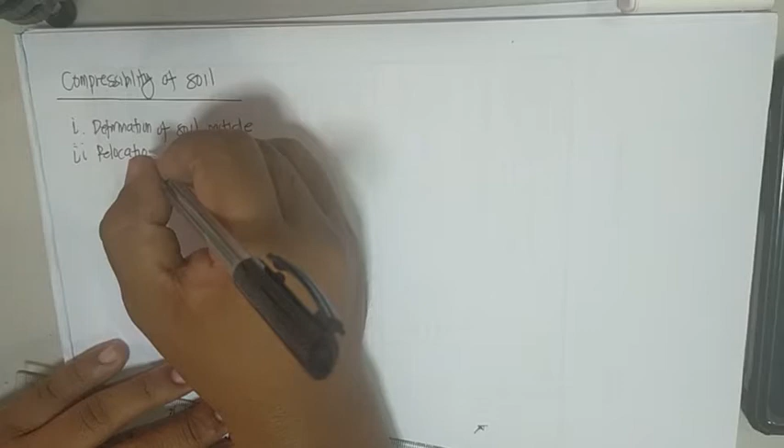the first one will be, there will be deformation of soil particle, and there will be relocation of soil particles.

And the last one will be, there will be expulsion of water or air from the void spaces.

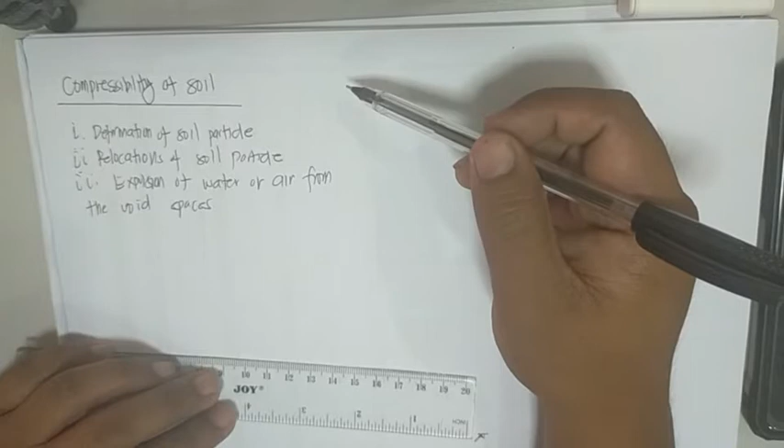Can you see it? So these three are the major factors, or the reason why there is compression. But of course, compression alone comes from the loads of the building.

And because of these three, there will be a settlement. So here, remember, in a soil particle, considering a soil particle, it will have voids and solid soil particles, and these voids can be water or air.

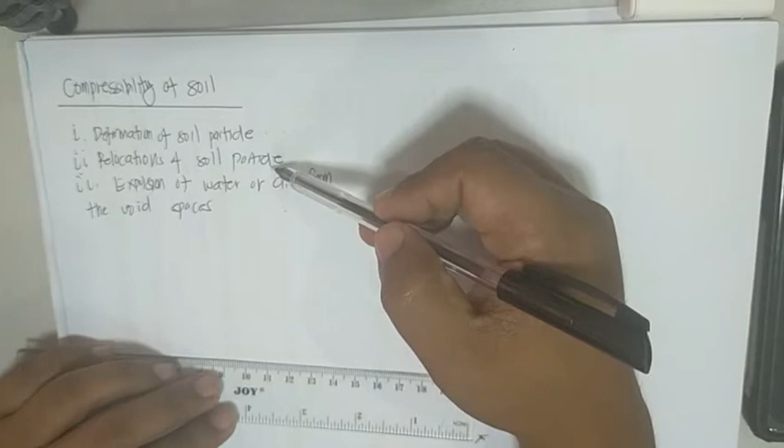So the first thing, when compression happens, it happens because there is deformation of soil particle. Secondly, there will be relocation of soil particle, meaning when we talk about soil particle deformation, the soil itself deforms, based on the load.

And for the relocation of soil particles, remember, considering a container having voids, considering different material, let's say these are the solid particle, solid soil, and these are the void spaces.

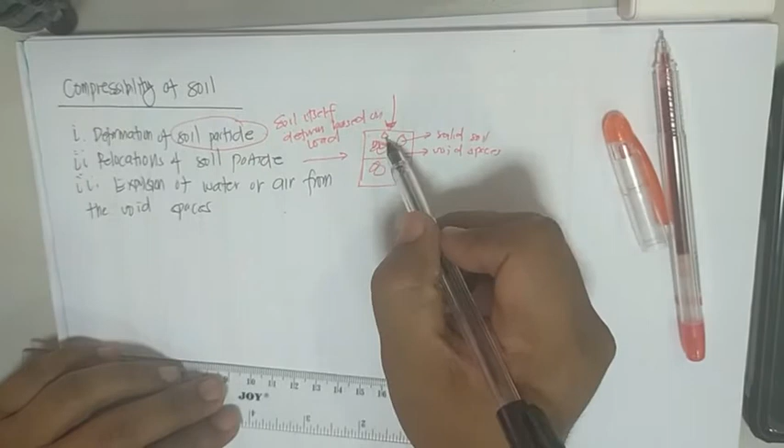So when there is a load, of course, some of the solid particle may move from one point to another point, and because of that, there will be a deformation. And the last one is the expulsion of water or air.

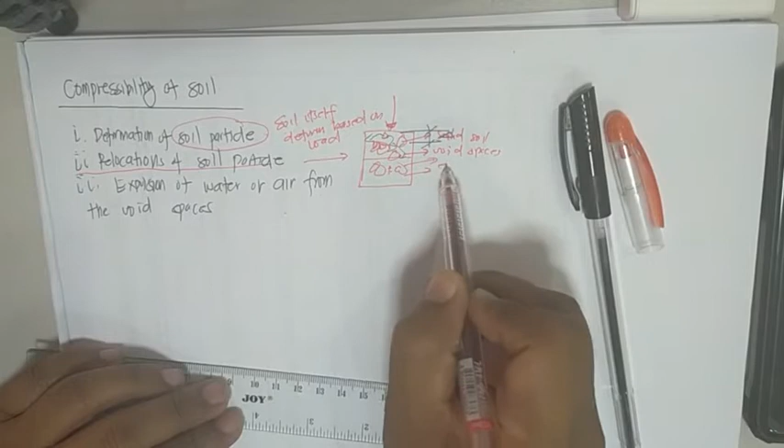So this is a continuous process of the second one. Because there is a relocation, there is also relocation of water or air, wherein some air, if this is the voids, this may be air or water, so there will be some expulsion.

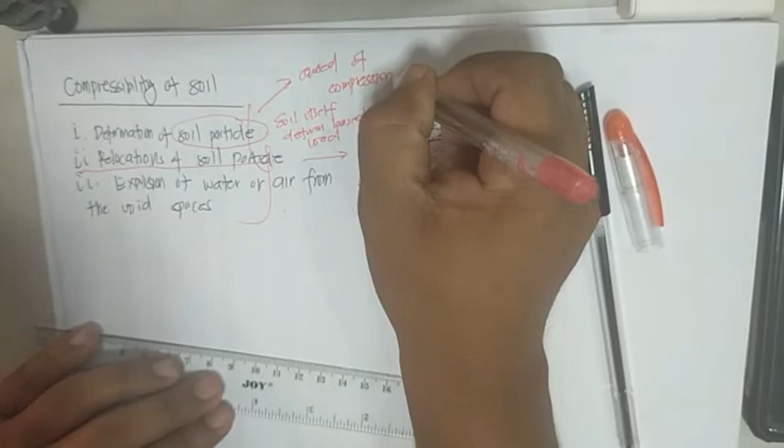So these are the cause of compression. These three are the cause of compression. Compression takes place because of these three. So let's continue, let's go to the soil settlement.

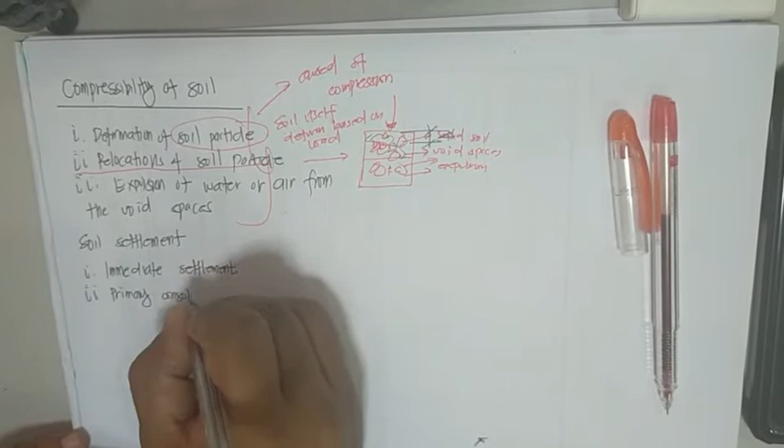So soil settlement will be divided into three. The first one will be the immediate. The second one will be the primary consolidation. And the last one will be the secondary.

So the first one is, this settlement is caused by the elastic deformation. Elastic deformation, whether it is dry, whether it is moist, or saturated.

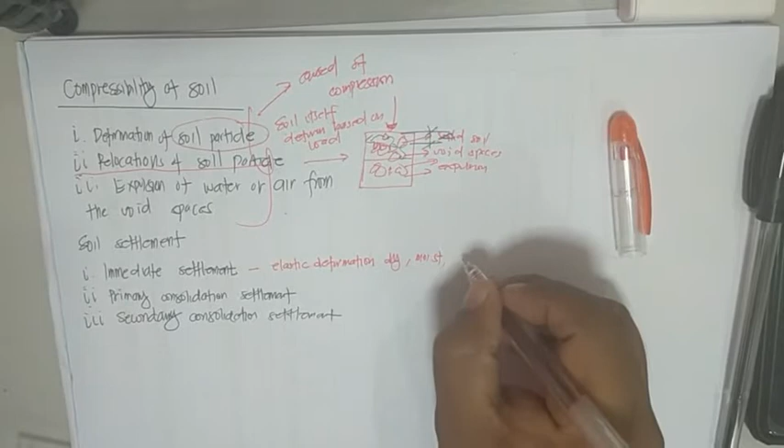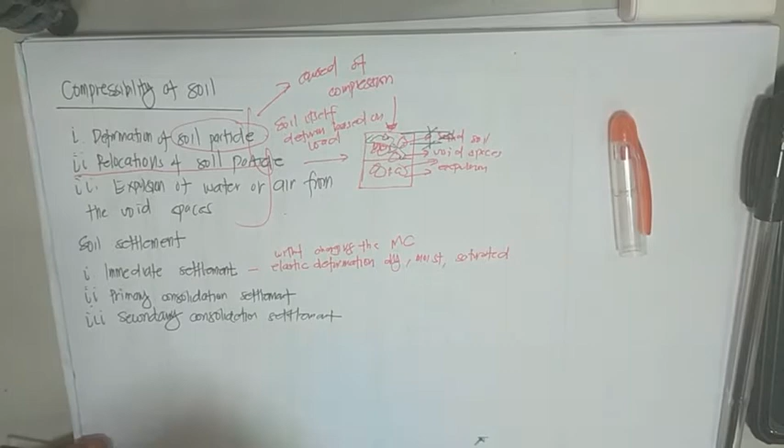Without changing the moisture content. So this immediate settlement is caused by the elastic deformation, whether it is dry, moist, and saturated. When we talk about elastic deformation, we can say that when the load is removed, of course, it will return to its original size and shape.

So immediate settlement is the deformation of any types of soil without changing the moisture content, because once there is already changing moisture content, there will be already the volume change.

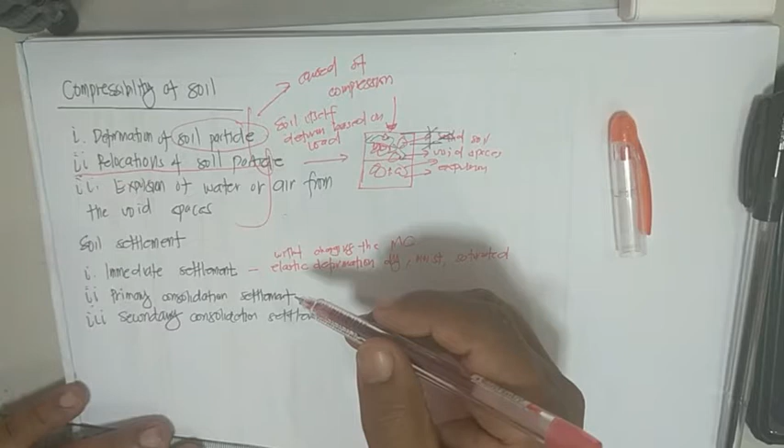So another one is the primary, caused by volume change in saturated cohesive soil due to expulsion of water that occupies the void spaces. What happened here in the primary is, for example, you have a container and you have solid soil and you have void spaces. There will be expulsion of water that occupies.

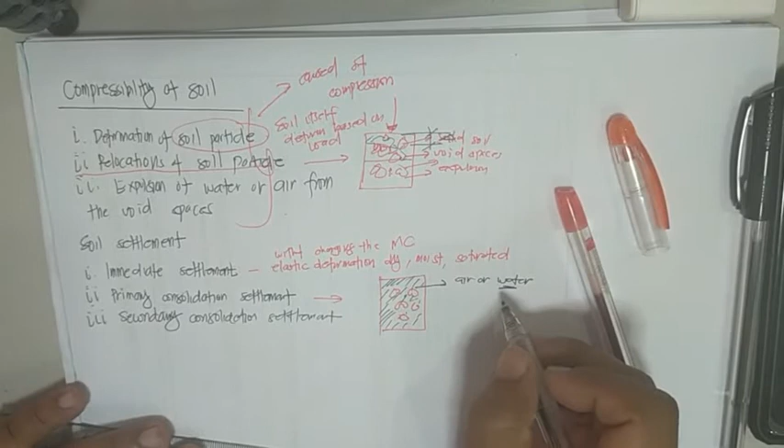So remember that these voids, the black mark, these voids, it can be air or water, but most probably more on water. So what will happen is, because of the load that applies here, some water inside of it will be

removed, or there will be expulsion. This happens because of the cohesive soil. Remember when we talk about cohesive soil, it has the ability to group into one.

Meaning all the soil solid will be together and some water will be out of the container, out of the picture. And of course in that scenario there will be volume changes.

And the last one, the secondary, is caused by plastic adjustment of soil fabrics.

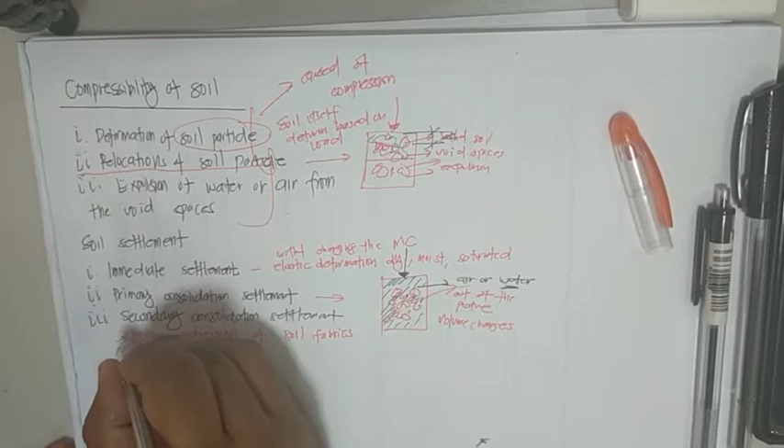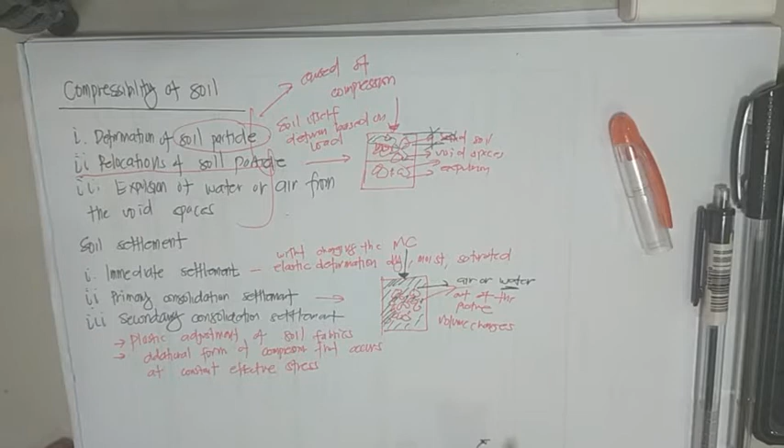So this is an additional form of compression that occurs at constant effective stress. Secondary consolidation settlement happens when there is already plastic adjustment of soil fabrics. If we look at the categories of soil settlement, this is the last one. Secondary consolidation is a form wherein there is already plastic adjustment, and this refers to when the soil cannot retain its original shape.

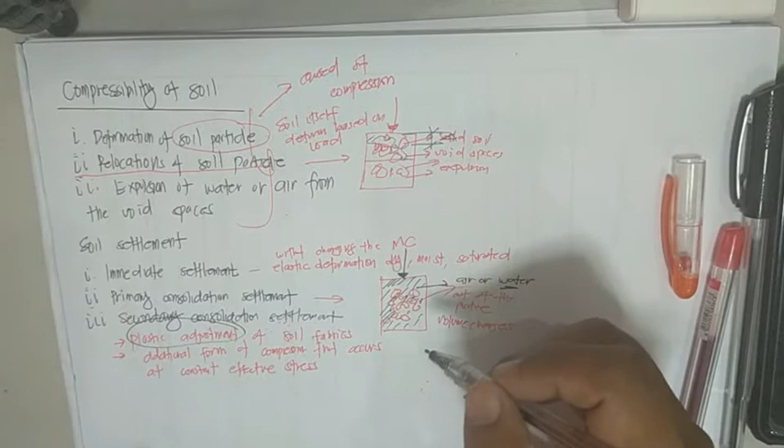So there will be an adjustment, an interaction of the soil when there is already expulsion of the water. Do you have any questions? I hope you understand the theoretical concept, so we can now proceed to the basic settlement formula.

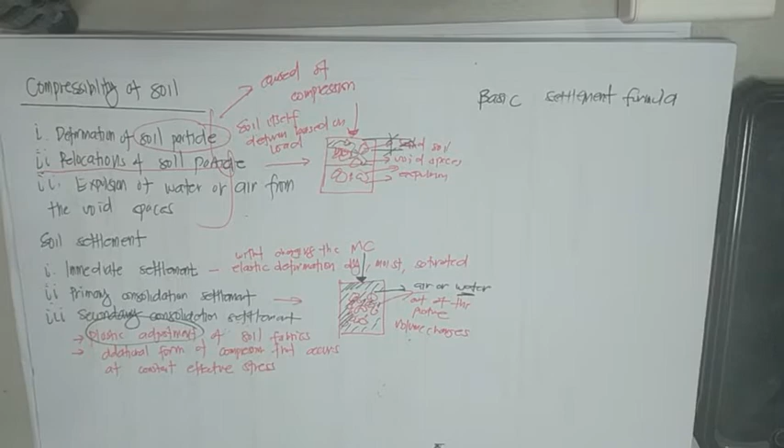What is this all about? The basic settlement formula is the foundation on how we derive the formula for primary consolidation. We can draw a sample to represent this, in the original state, and we have also here the compressed state.

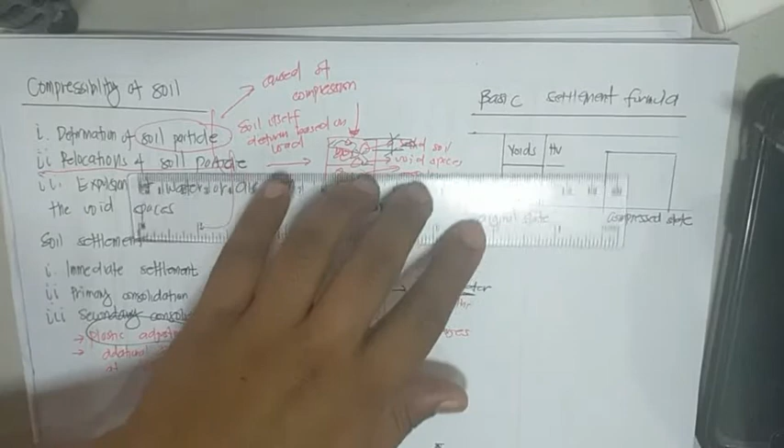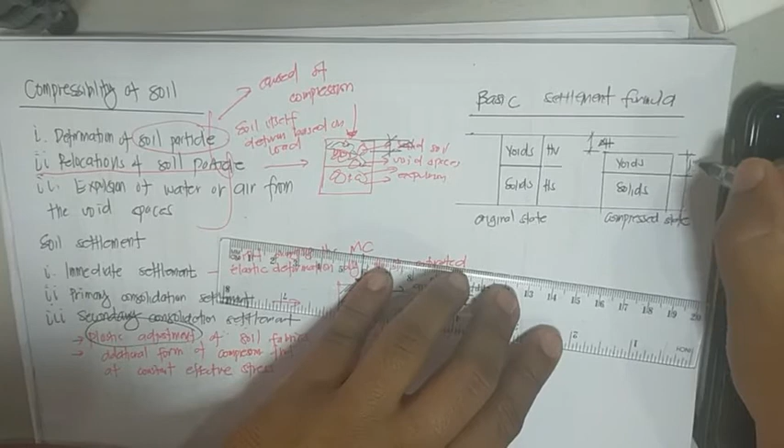Of course, you have here voids and solids. This one refers to height of solid, and this is height of voids. In the compressed state, there will be a difference between the two, which we call delta H. Again, this is voids and this is solids, and this is the height of voids prime, because it's already the new height related to solid.

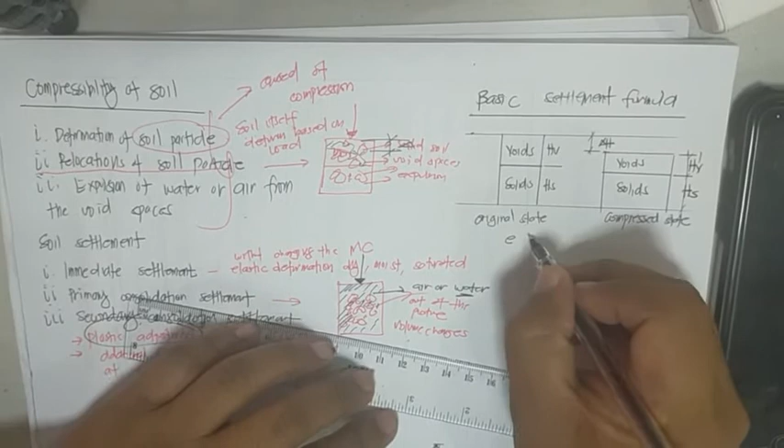What we can notice is, remember that void ratio E is the formula: height of voids over height of solid. So we can say height of voids is equal to E times height of solid. Now, the total height is height of voids plus height of solid.

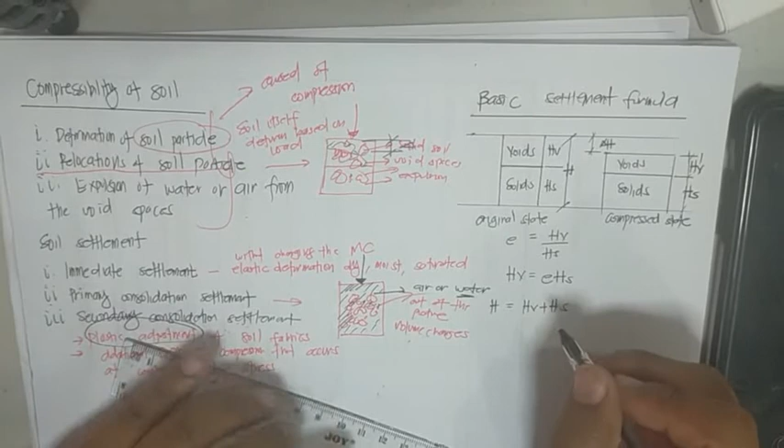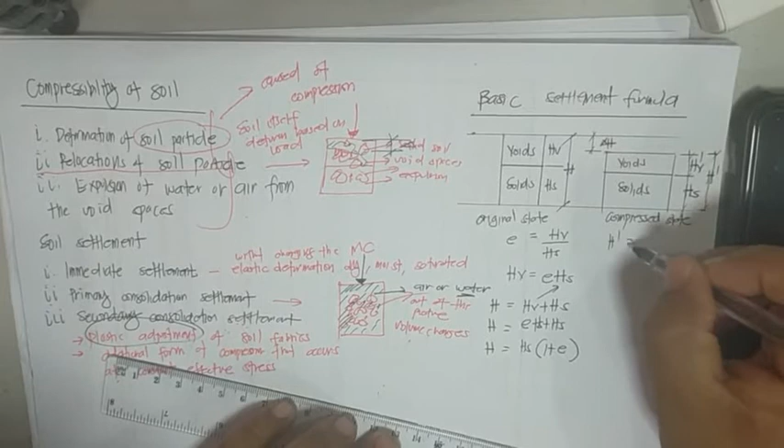Height of voids is E times height of solid, plus height of solid, which is H. So H is equal to height of solid times 1 plus E. If you consider this new value, this is now called H prime, so H prime is H prime of voids plus HS, and height of voids prime is equal to E prime times height of solid.

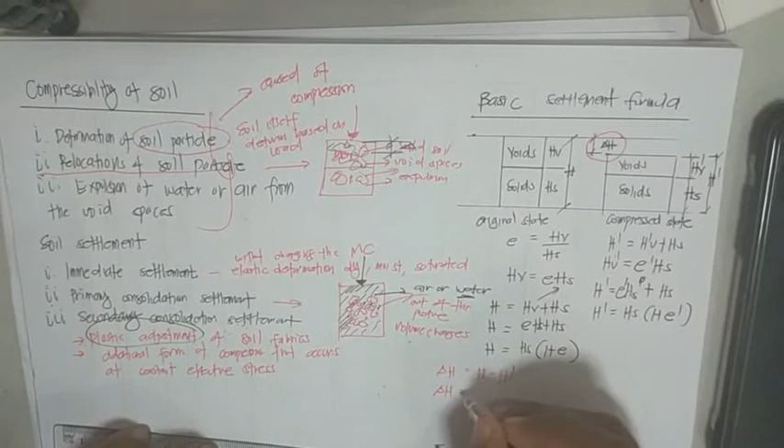So now you have two equations derived. From this figure, what can we notice about delta H? This delta H is actually total H minus H prime. And delta H is H minus HS times 1 plus E prime.

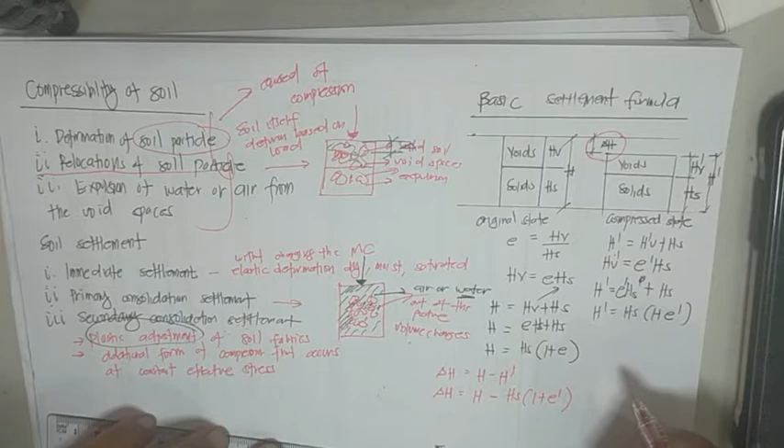But if we notice, and we can equate the value of HS, here H prime is HS times 1 plus E prime. What is this value? Based on that, it will be H over 1 plus E, multiplied by 1 plus E prime.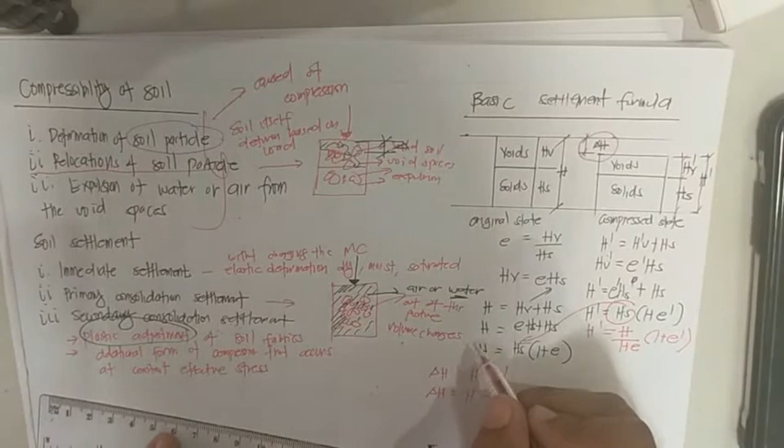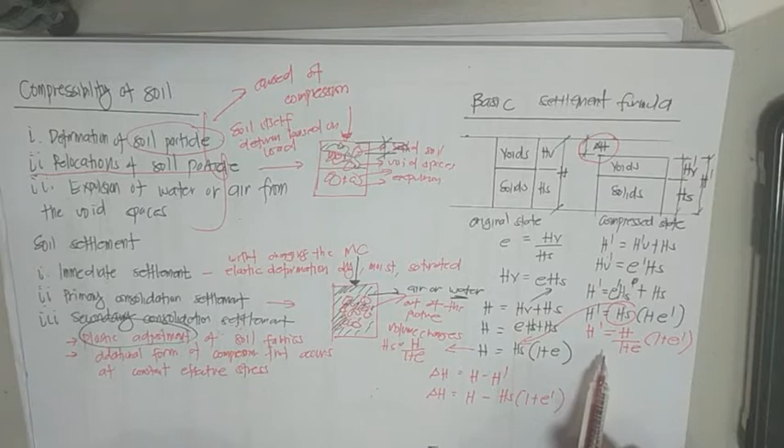Because here, this one is actually HS equal to H over 1 plus E. This is the term that I substituted here. So H prime is equal to H over 1 plus E times 1 plus E prime.

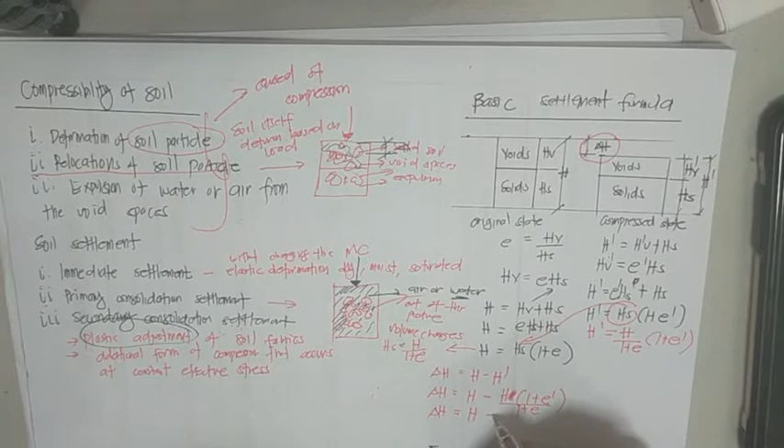What else? So delta H is equal to H minus H over 1 plus E times 1 plus E prime. Or you can factor: H times 1 plus E minus H times 1 plus E prime, over 1 plus E. Which means delta H is actually H plus HE minus H minus HE prime, over 1 plus E.

Cancel this one. Delta H is H E minus H E prime, over 1 plus E, which we can now conclude that delta H is H times E minus E prime, over 1 plus E. Sometimes this E minus E prime is called delta E. Can you see it? So now the final formula is delta H equals H times delta E over 1 plus E.

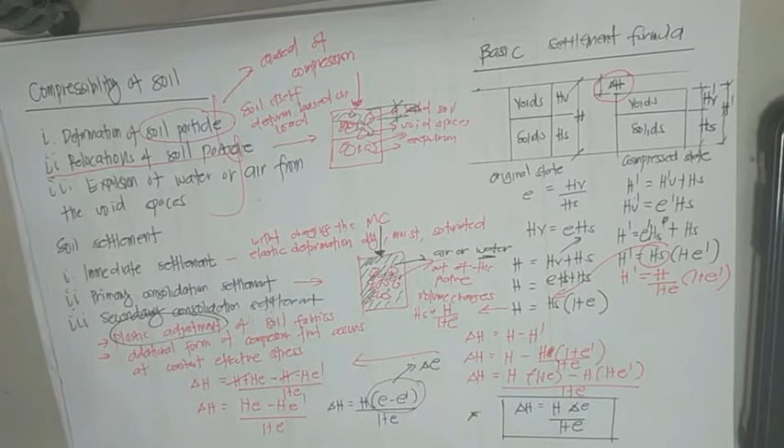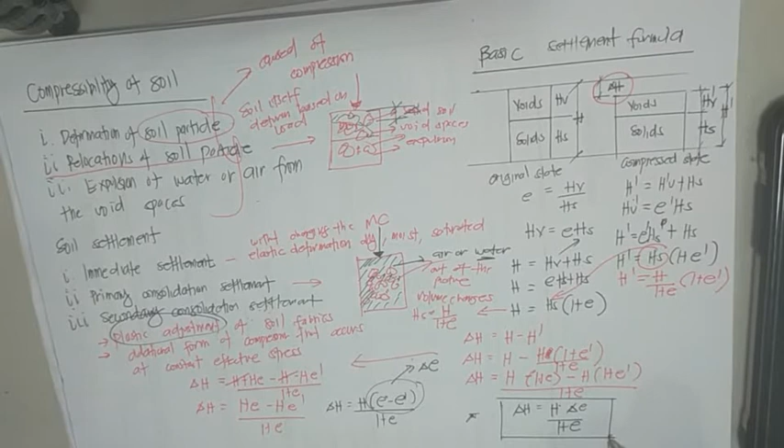Where H is the height of the stratum, E is the void ratio before the vertical load or the original, and E prime is the final void ratio after the vertical load is applied. This is the general term on how to determine delta H, or the settlement. Now we will move to the next subtopic.

Okay, so now we will go to the different empirical formulas that can be used for consolidation settlement. The first one here, we have the primary consolidation settlement, and the first case is for normal consolidated soil.

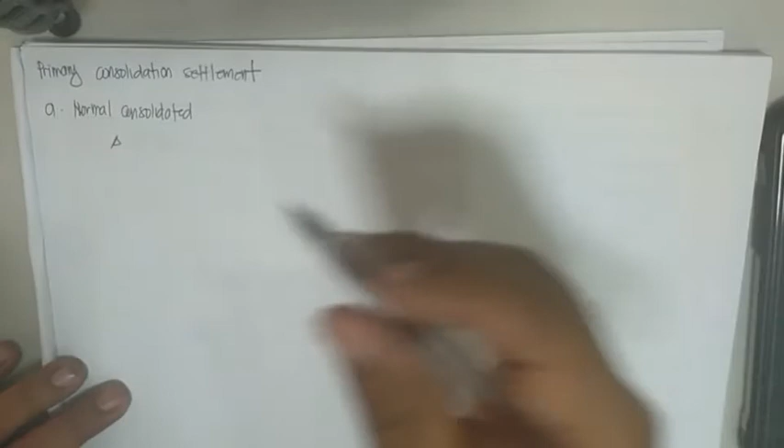So the formula to be used there, for the settlement, is delta H. The delta H is equal to H times CC over 1 plus EO, times log of PF over PO.

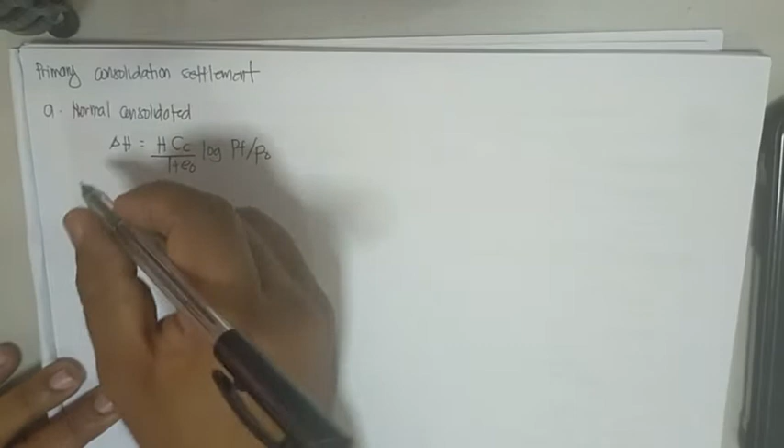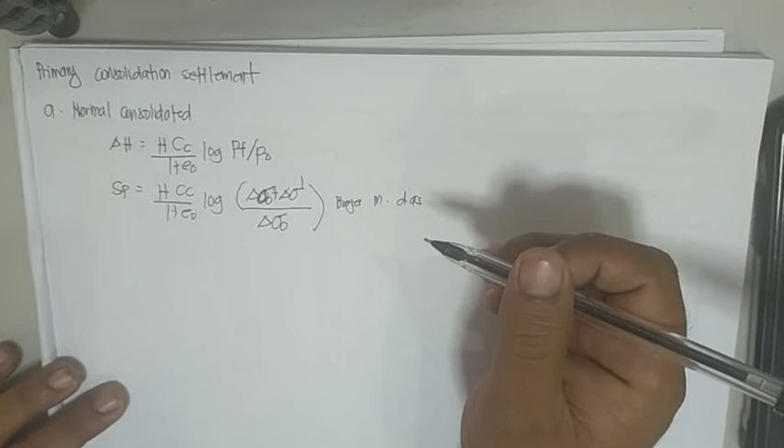Okay, for this is Braja M. Das. So you can use either of the two. By the way, the value of PF here is actually PO plus change of P.

So this is for normal consolidated. H is the height of the stratum. CC is compression index. EO is the initial void ratio. PF is the sum of PO plus change of P. PO is the initial vertical effective soil stress, and PO is the initial and PF is the final, and PF is PO plus change of P.

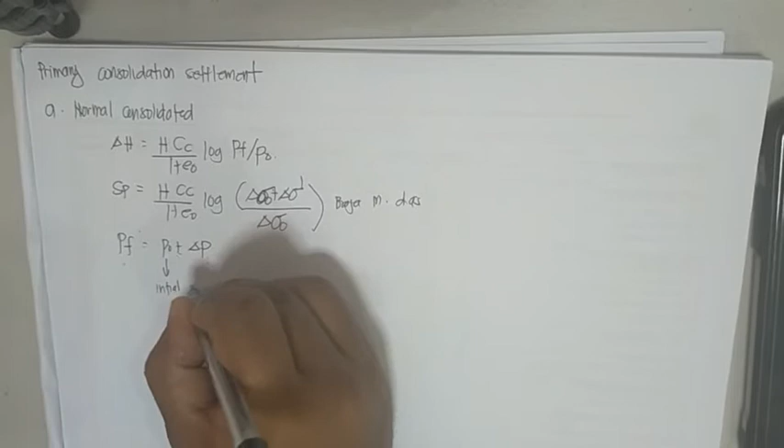By the way, what is this PO? This is the initial vertical effective stress.

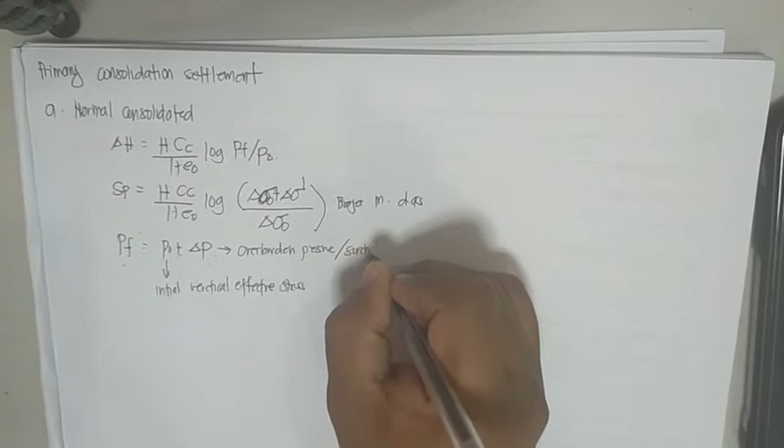And what else? The value of change of P, it can be overburden pressure, or it can be sometimes called surcharge.

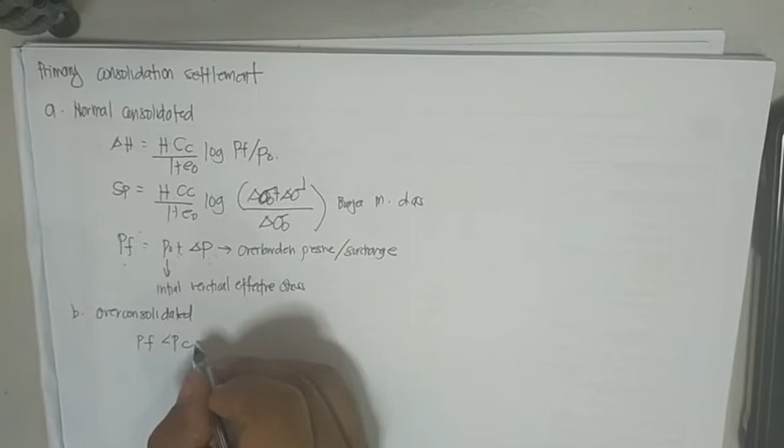So now we have another formula which is for over consolidated. So here, you need to identify whether PF is less than PC, where PC is called the pre-consolidation pressure.

So for this case, when the value of PF is less than PC, you can use delta H is equal to H CS over 1 plus EO, log of PF over PO.

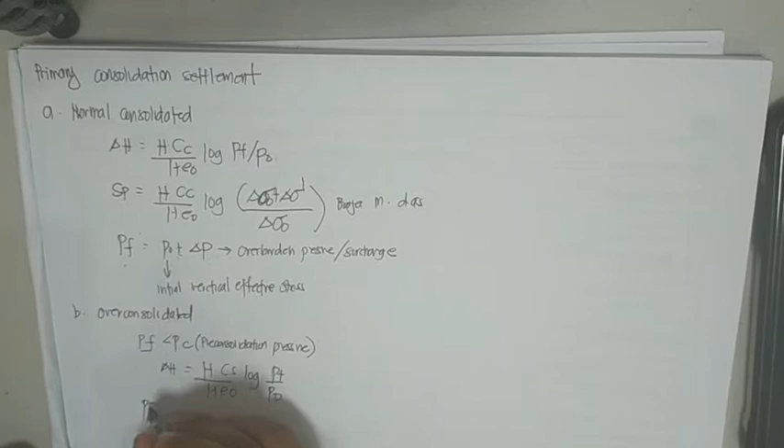But when PF is more than PC, delta H will become H CS over 1 plus EO, log of PC over PO, plus H CC over 1 plus EO, log of PF over PC.

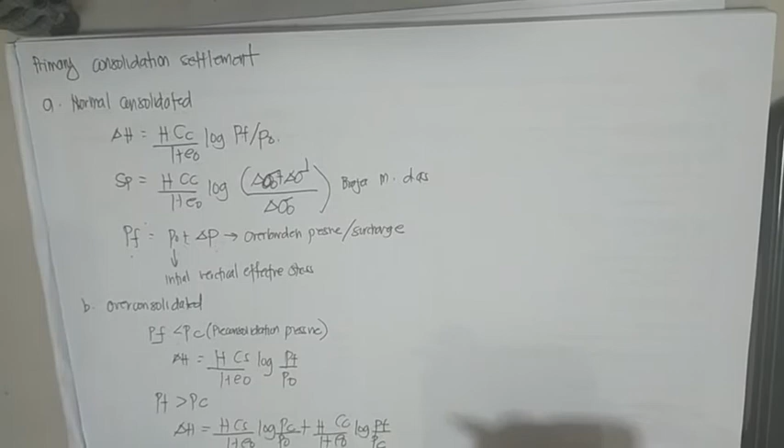So these two formulas are needed when you are comparing these two, and if we are in over consolidated condition. So again, for CS, it will be swell index, and everything will be the same as normal consolidated.

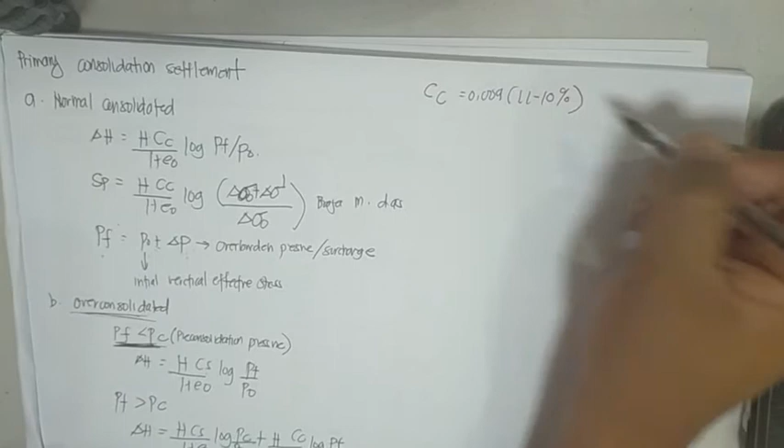Okay, so most of the time, we assume that the value of CC is 0.009 times LL minus 10%. But of course, in some other books, it depends on the situation, because this assumption is only for undisturbed clay.

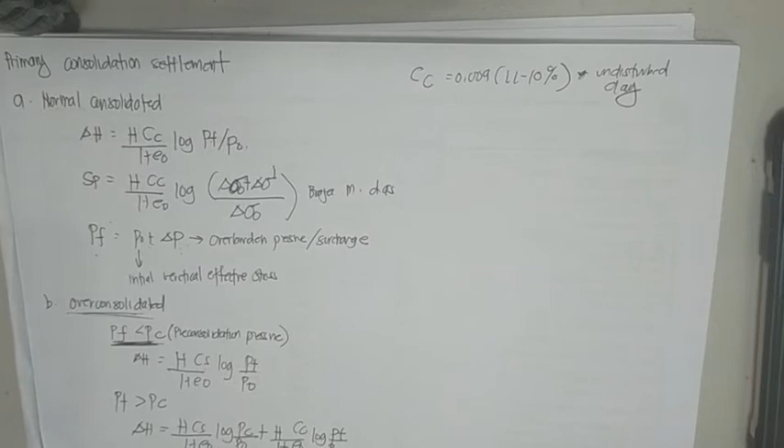So, what else? These are the settlement for primary. We have also settlement from secondary consolidation.

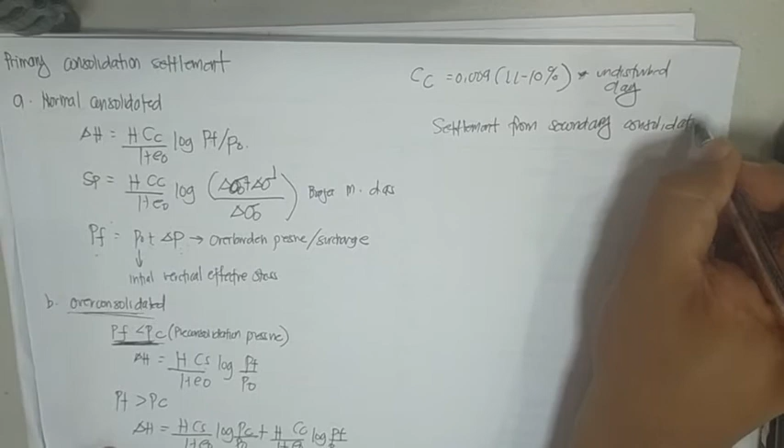By the way, class, don't be confused with the formula or the term used here, because now I'm just using the book of Gillesania. But for Braja M. Das, it's the same, only the use of the terms or the constants differ. The definition of each term is the same, only the term itself is different, but the definition will be the same.

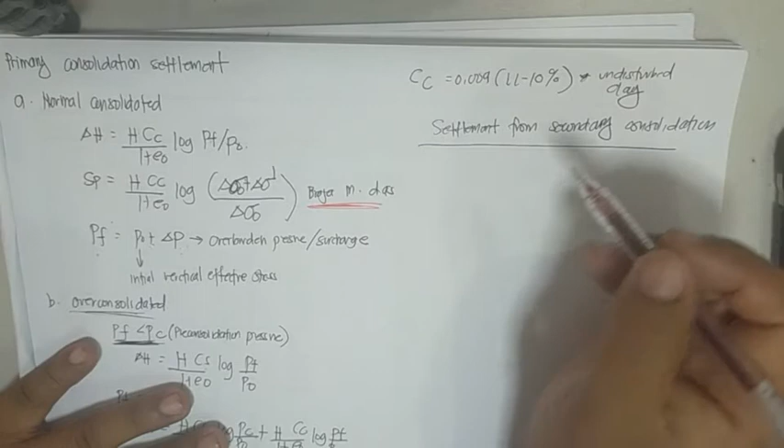So for the settlement of secondary consolidation, this happens when there is complete primary consolidation. And usually, the final time to attain the primary consolidation will become the initial time for the secondary settlement. The formula to be used there is delta H for secondary is C prime alpha, H, log of T2 over T1.

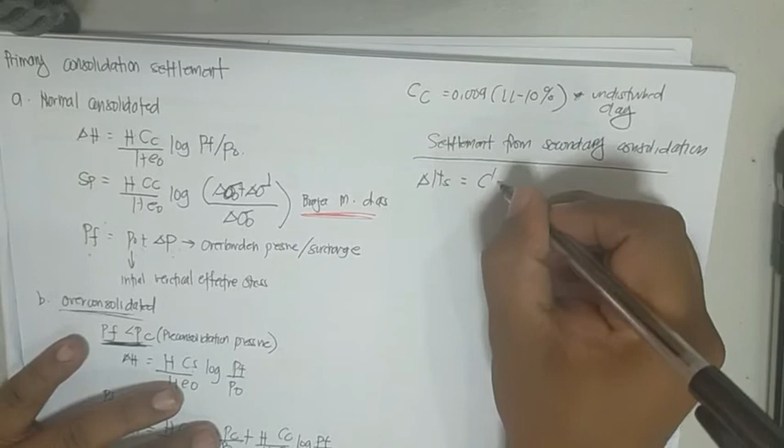So T2 will be the time after the completion of primary settlement where settlement is required, and T1 is the time for completion of primary settlement. T1 is the time for completion of primary, and T2 is the time after the secondary settlement.

C prime alpha is C alpha over 1 plus EP, where EP is called the void ratio at the end of primary consolidation.

And also C alpha, this is C alpha. C alpha is delta E over log of T2 minus log of T1. So these are the formulas to be used. Then we have also the immediate settlement.

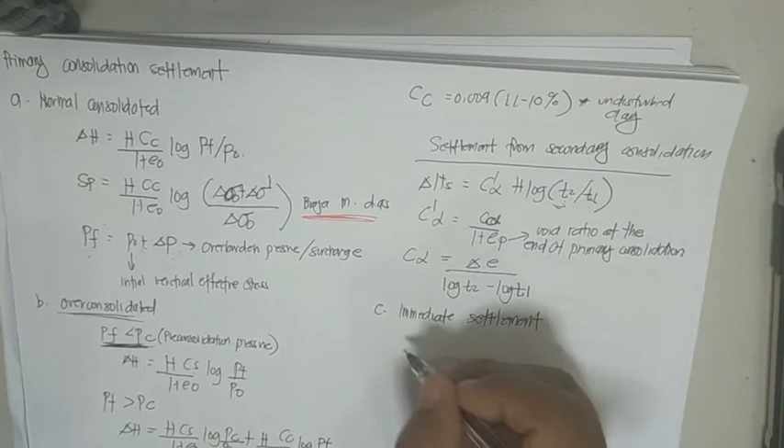For immediate settlement, you can use this formula: settlement is equal to the pressure times the width or diameter of foundation, times 1 minus mu squared over E, times IF. This is the net pressure.

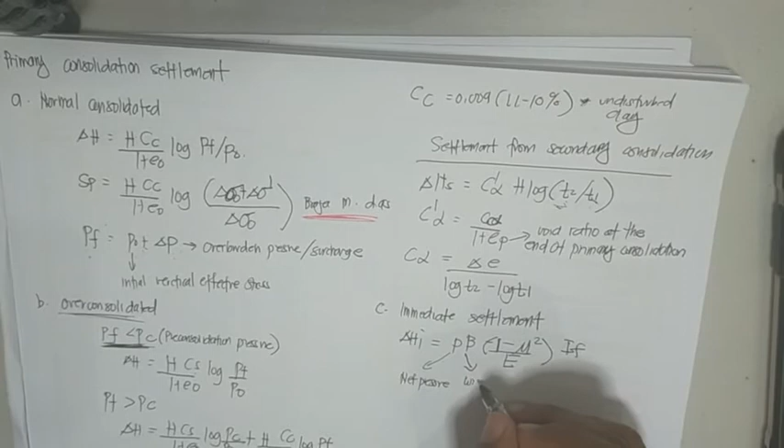This is the width or diameter of foundation. This mu is the Poisson's ratio. E is the modulus of elasticity. And IF is called the influence factor.

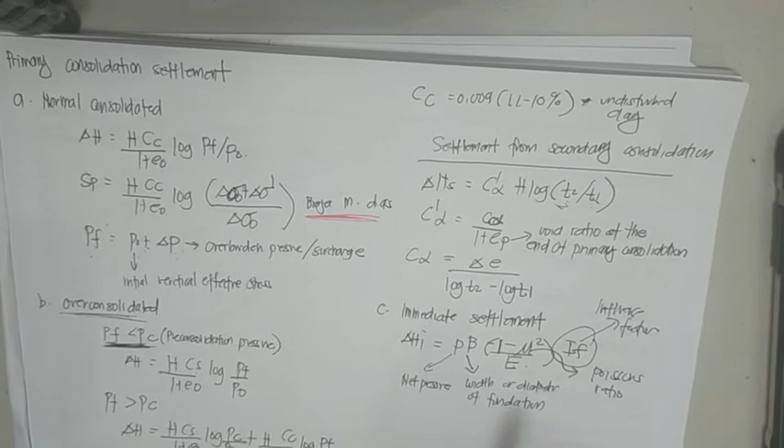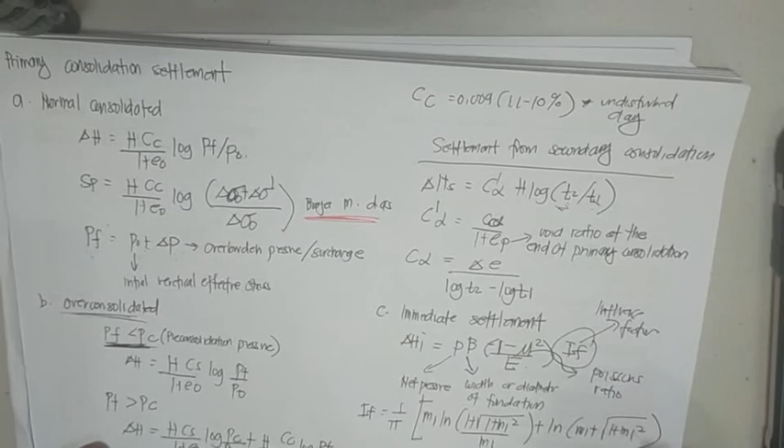For the influence factor, you can use the formula: IF equals 1 over pi multiplied by M1, ln of 1 plus square root of 1 plus M1 squared over M1, plus ln of M1 plus square root of 1 plus M1 squared. So this is for the influence factor.

But of course, for M1, it depends on the type of foundation—if it is circle or rectangular, then if it is center, corner, or rigid.

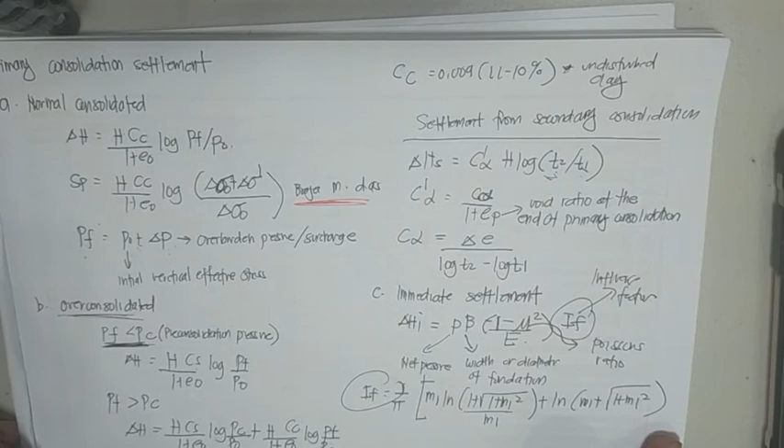Can we proceed? How many minutes do we have? 32 minutes, so we will proceed. So what I'm discussing now is only the empirical formula and the concept. So we have also here the time rate of consolidation.

Time rate of consolidation: the time T required to achieve a certain degree of consolidation U is evaluated as a function of the shortest drainage path within the compressible zone HDR, the coefficient of consolidation CV, and the dimensionless factor TV. So the time T is equal to TV multiplied by the height of drainage quantity squared over CV.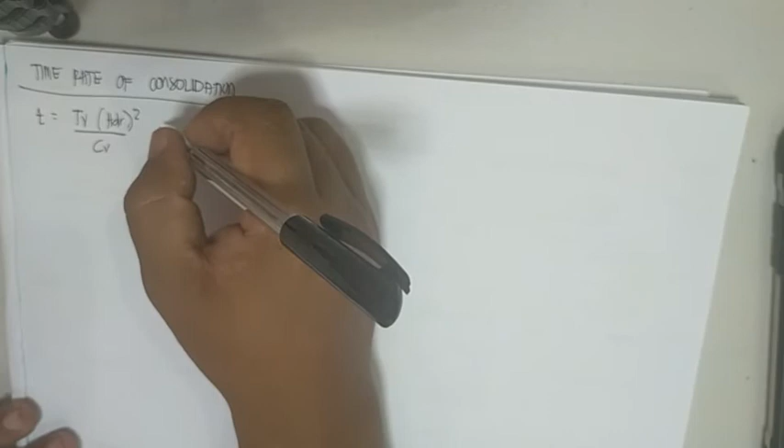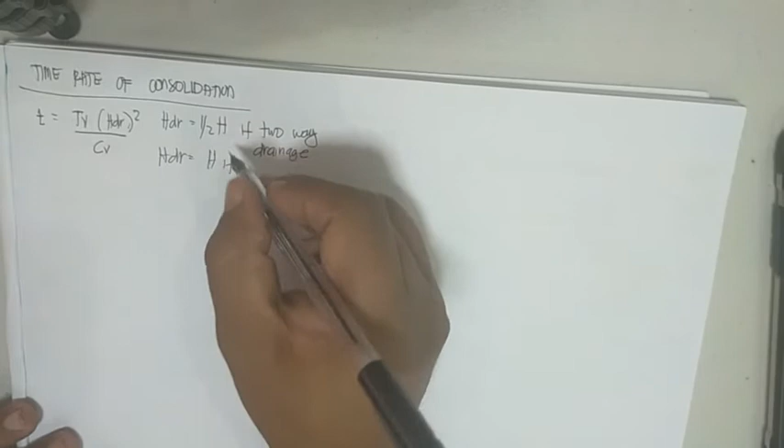So what is this TV? TV is the dimensionless time factor, and HDR is the height of the drainage. Remember that HDR is equal to 1/2 of the height if two-way drainage, and HDR is equal to H if there is only top or bottom drainage.

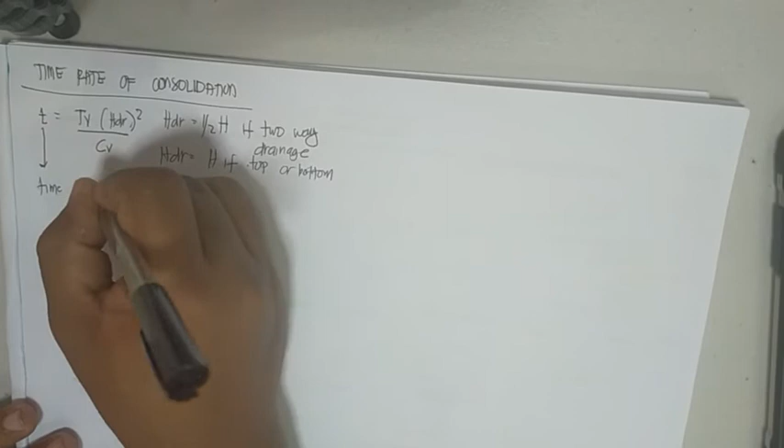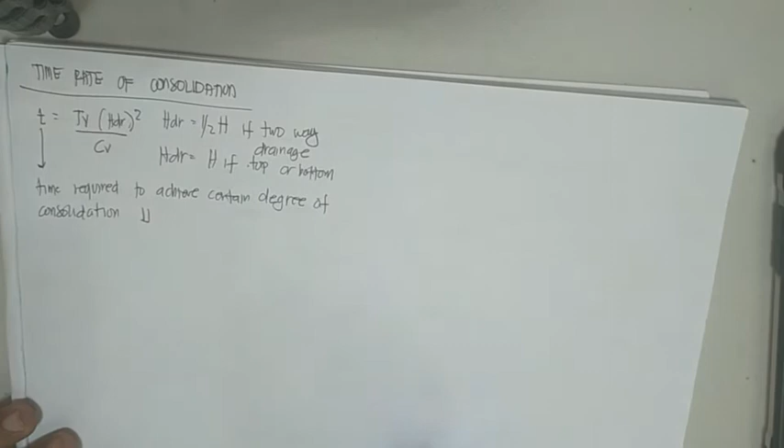So this T is the time required to achieve a certain degree of consolidation U.

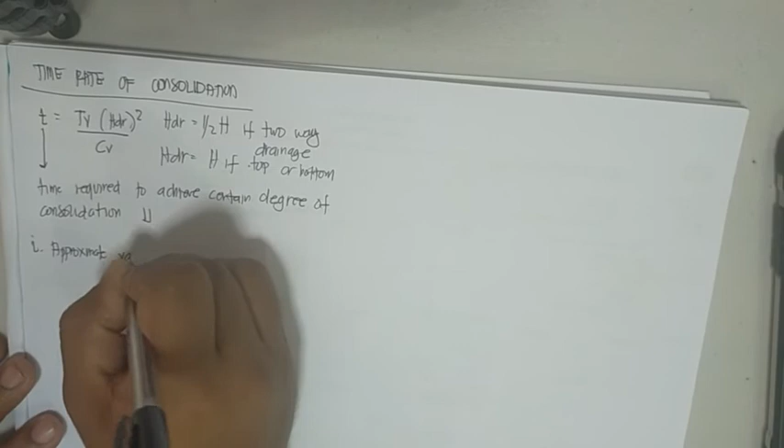So we have different ways on how to determine the value of TV. We have here, for example, the approximate value of TV. It depends: if U, the consolidation, is 0 to 60%, you can use TV equals pi over 4 times U in percent over 100, raised squared.

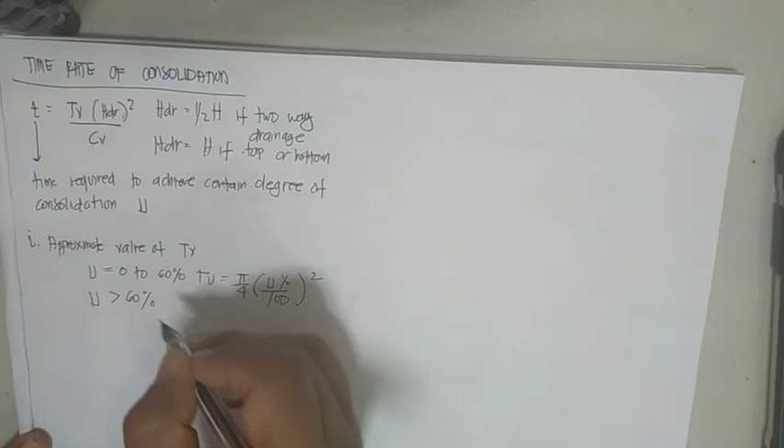Or if U is more than 60%, TV is 1.781 minus 0.933 log of 100 minus U percent.

The time factor TV provides a useful expression to estimate the settlement in the field from the result of laboratory consolidation. So we have a direct calculation on how to determine the time required to attain a certain degree of consolidation, whether we are in the field or in the laboratory.

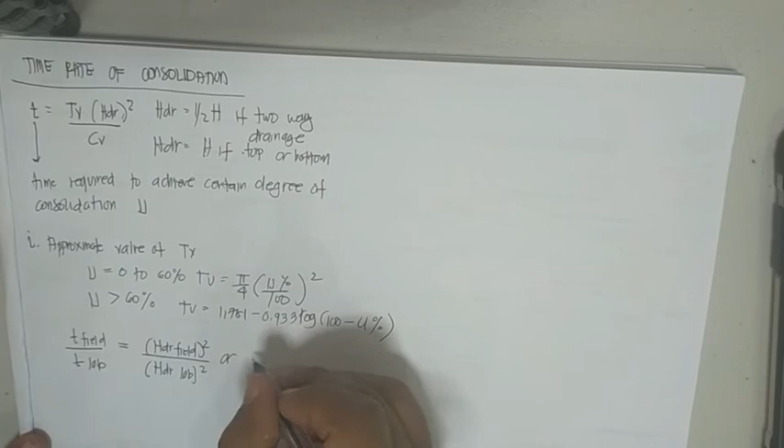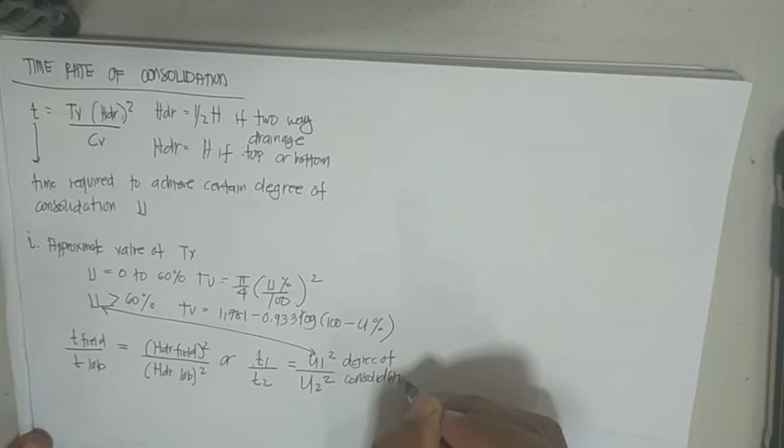So we have here: T field over T lab is equal to HDR field squared over HDR lab squared. Or we can have T1 over T2 is equal to U1 squared over U2 squared. T is the time required to attain degree of consolidation, and U is the degree of consolidation, same as before.

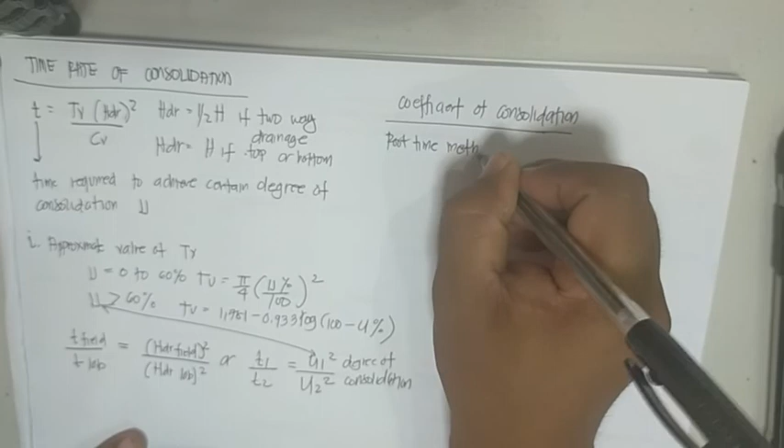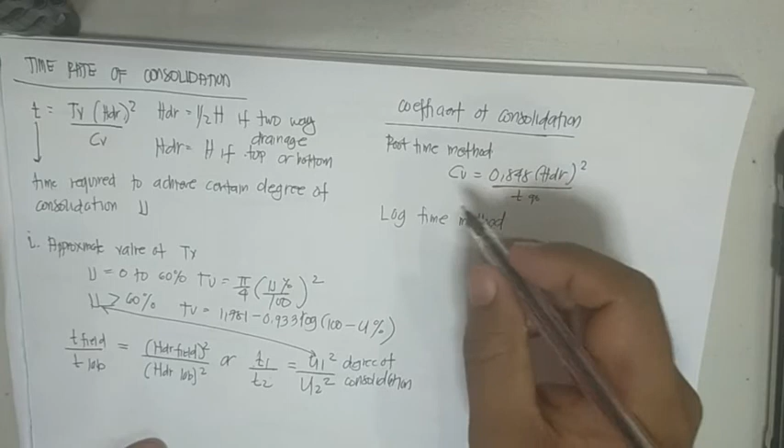So we have also the coefficient of consolidation. For coefficient of consolidation, we have the root time method, which is CV equals 0.848 times HDR squared over T at 90. Then we have also the log time method: CV is 0.197 times HDR squared over T at 50.

Of course, you can determine the value of T. The T90 and the T50 here is the time for 90% consolidation.

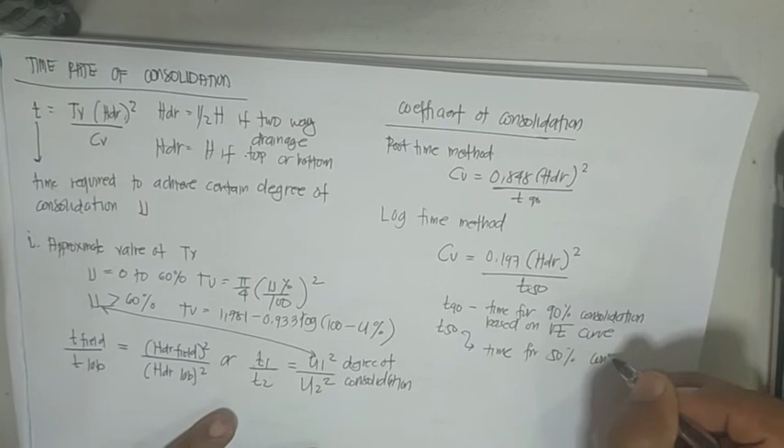Based on the square root of T curve. Then T50 is the time for 50% consolidation based on the logarithmic T curve.

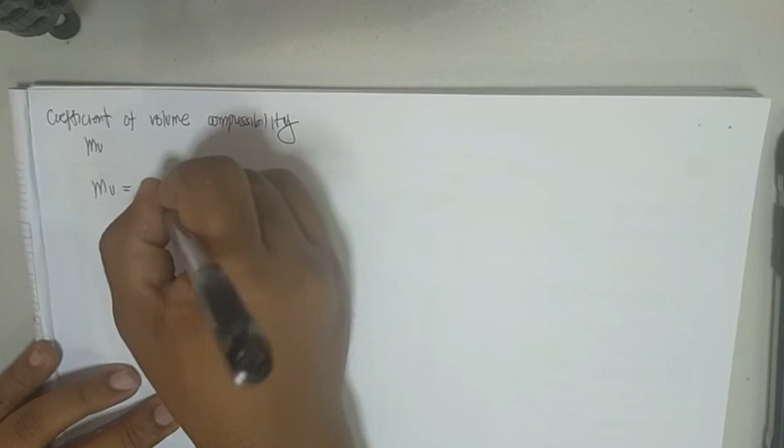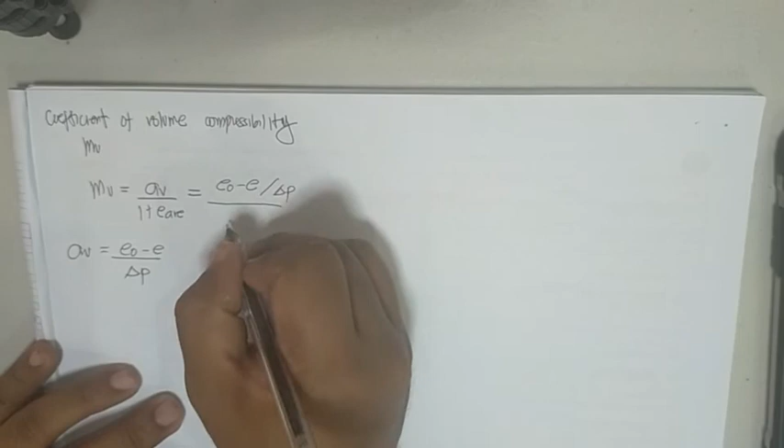So the other one is the coefficient of volume compressibility, which is called MV. MV is equal to AV over 1 plus E average, where AV is actually EO minus E over change of P. So, EO minus E over change of P, over 1 plus E average. While E average is equal to E plus EO over 2.

Then we have also K, which is CV times MV times gamma of water, which is called the hydraulic conductivity of the layer for the loading range.